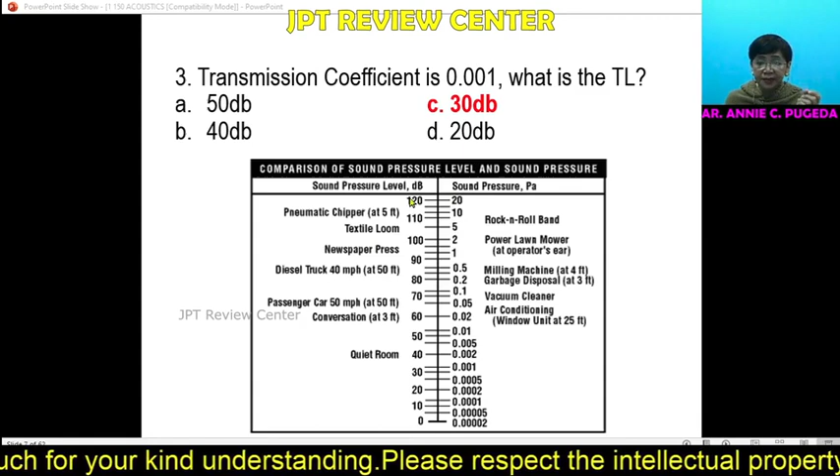So, actually, hindi nga TL yun, sound level. Now, tingnan nyo, if you compare sound pressure level, which is measured in decibel, and sound pressure, which is measured in Pascal - yung level, yung narinig mo, yung sound pressure level, maingay o mahina. Yun ang perception natin as human being. So halimbawa, pag pumalakpak ka ng ganyan, mahina ang pressure mo, mahina ang Pascal. Malakas, maingay din. So sound pressure level is equivalent to sound pressure, which is decibel and Pascal. Kaya nung sinabi niyang 0.001 transmission coefficient, nakikita niyo sa sound pressure, 0.001.

Ano katapat niya? Hala, 30. Anak ka ng Diyos, pag kabisado mo yan. Okay, yun lang po sinasabi ko. Ito yung mga, sige, bigyan ko kayo ng senaryo para ma-motivate kayo.

Control. Hi! Hindi pala control ba? Ayaw.

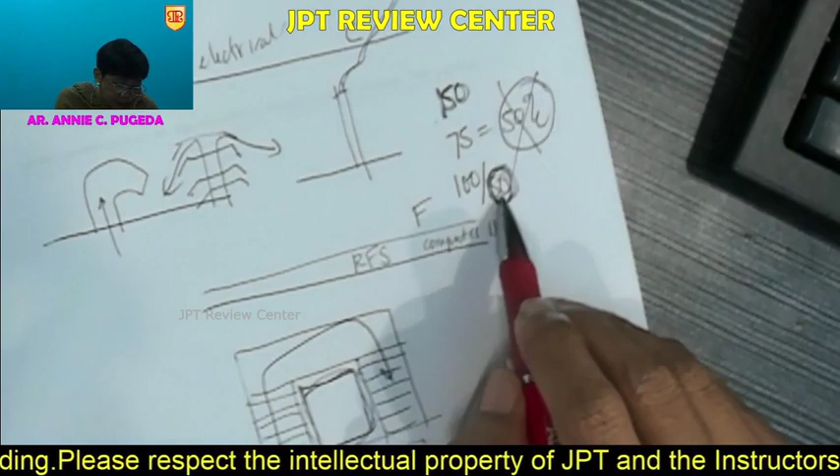150 items yung binibigay sa board exam. Assuming 75 lang nakuha mo, 75 is 50% transmuted. May tamang tulog yan, huwag yan ang ini-aim mo, kalahati nito. Pag na-elevate mo sa 100 over 150, sa decision making, ano yung 50 mali mo? Okay, ano yung 50 mali mo dyan? So pagka ganyan, 100 over 150, do the math, 100 divided by 150.

So lumalabas, nag-prepare ka sa 70. Kapasa-pasa yan. Nakita nyo, ipasa sa Diyos nyo na yung isang yan. Siguro nandyan na yan.

Diba? So look at it this way. Again, I'm repeatedly saying this. You have 150 questions na binabato sa'yo ng client, ng engineers, ng mga tao sa paligid mo. And then, once na tanong ka nila at nagkamali ka, decision making yan. What could be the 50 that you do not know? Na pwede mong sabihin, hindi ko kabisado yan, i-consult natin sa engineer. Okay? But for some na talagang alam na alam mo, that could be the 100.

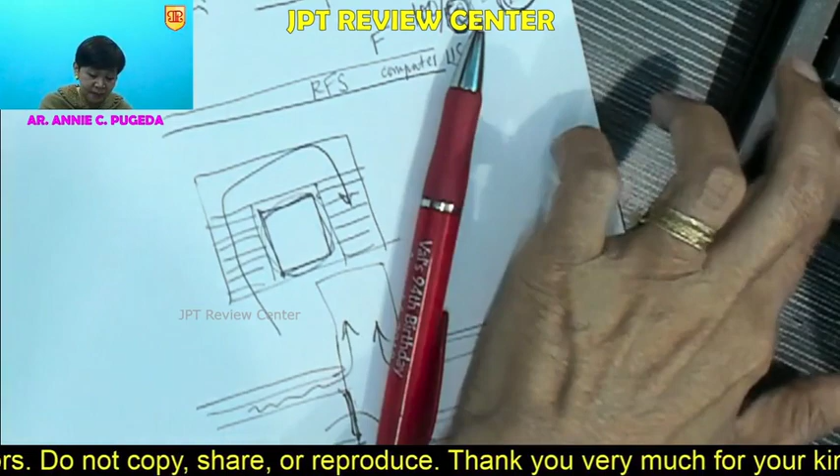The 50, that could be something that you need intervention or you need the help of allied professional services. So it goes to say na dapat man lang ma-elevate ang knowledge mo sa utilities or other subjects sa 100, or 70%, not 50%, kalahati. Kalahati alam ko, kalahati hindi, ganun. So itong mga ganito, yung example na ganito, pwede mo nang ipasa sa Diyos yan. Okay? Pero kung talagang guided ka, so be it.

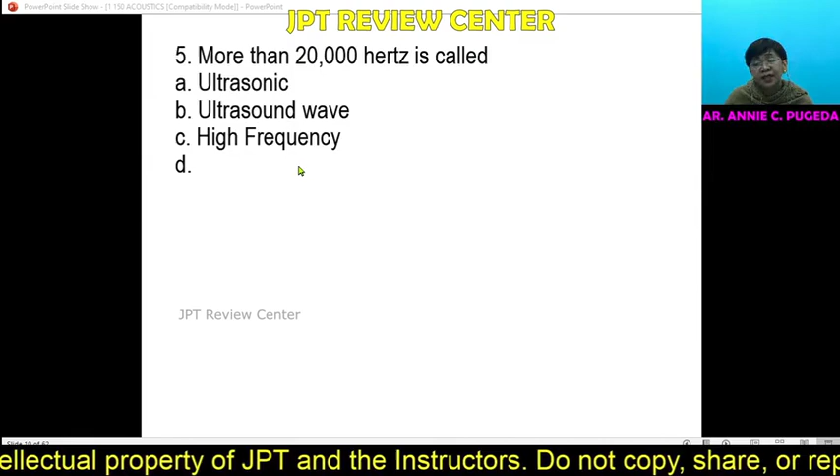More than 20,000 Hertz is already read by equipment like ultrasound, ultrasonic devices. So more than 20,000 Hertz is known as ultrasonic. The definition: the science and exploitation of elastic waves in solids and liquids which have a frequency above 20 kilohertz or 20,000 Hertz.

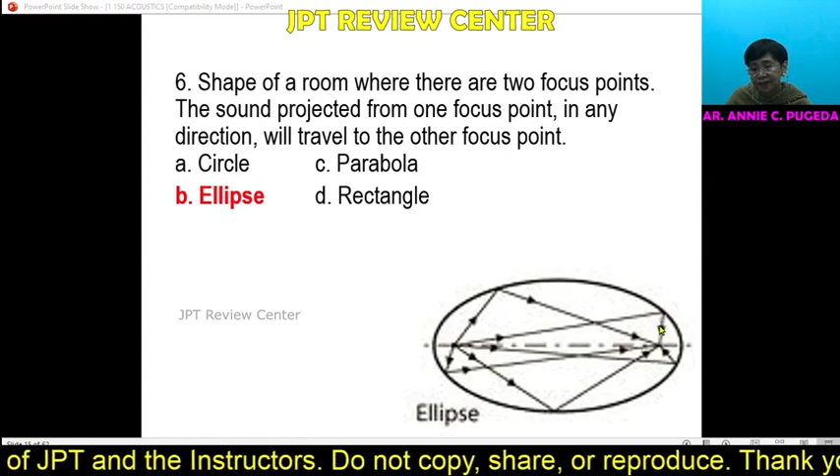Now, if you have a conference room and you want your voice to be equally shared, what would work? If you make it concave, it creates a specific focal point or what's called foci - concentrated, and that can be deafening. But if you make it convex, the sound spreads evenly. You already know the answer - convex spreads evenly, while concave concentrates sound at the focus point, which is deafening.

The shape of a room - as I mentioned, is an ellipse - has two focus points, one here and one there. With one focus point, that would be a parabola. So that's what's called sound foci.

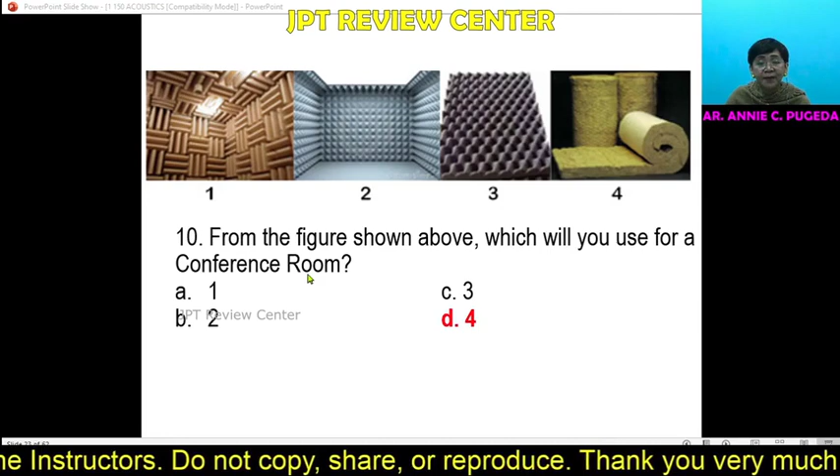Now let's look at the illustrations. From the figure shown above, which we'll use for a library, it's obvious that number 4, the mineral wool packed into the wall, is hidden from view. We don't see that mineral wool, but we know it's a good way to insulate the library from noise. So it goes the same for a conference room - it would also use mineral wool.

So a diffusing element would be best for a music studio. For example, when recording, you want to control the treble, control the bass, to balance it. The best way to control that is through wall, ceiling, or floor treatment which is more complete - so it's better to choose number 2 over number 3.

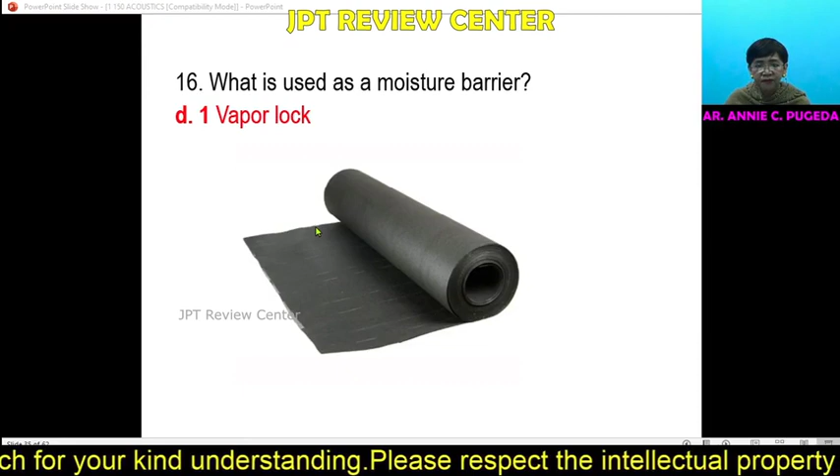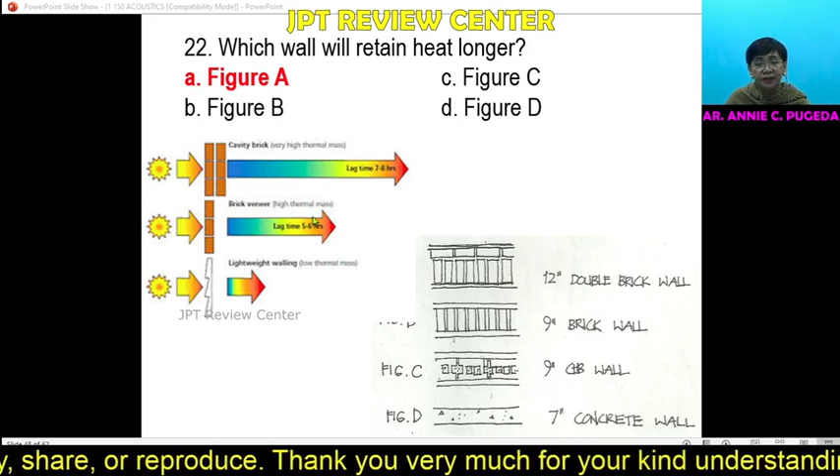And then, best sound insulation to be used in a house fronting a busy highway. This is similar to our dance studio example. So again, it didn't say veneer, but the better, thicker option, and that would now be a double brick wall.

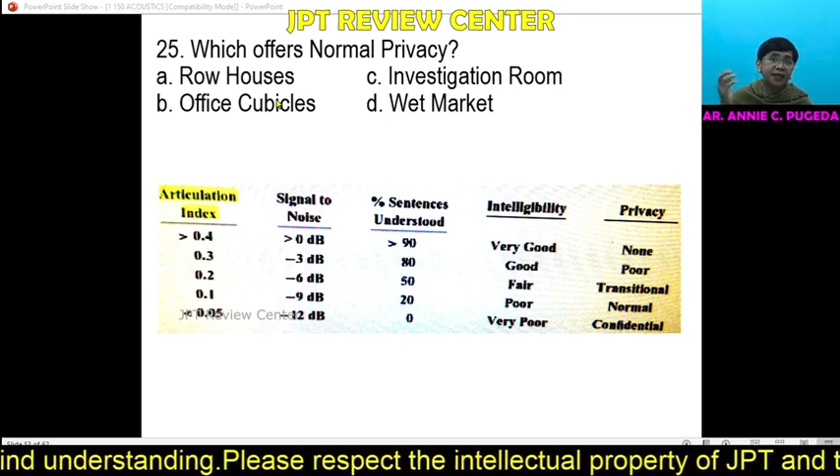What is the meaning of confidential privacy? Look, most often, this degree of privacy can be achieved only in closed offices, and therefore a room. And if it offers normal privacy, so your cubicles, especially the office or modular cubicles, they're not enclosed. So this is normal privacy because you have, remember the glass I mentioned earlier, glass because of visual acuity or glass because of reflection. That's it. Office cubicles, normal privacy.

This degree of privacy can be achieved in open offices, thus the office cubicles. This offers transitional or transmittal privacy, transmitted from one unit to another or one room to the other. So the privacy is lost in that part. And therefore, it can happen in row houses. Transitional privacy, that's how it's said. Okay?

Complaints are experienced by persons that wish for more privacy. This degree of privacy is often achieved in a room when no attention is paid to acoustical design. Right? Only a party wall separates them. So, go ahead, hear each other.

You are commissioned to design a music room, what will be used for flooring? Since we have wood, then I will stick with wood. But if there's a question like this, with no wood option, I will go to carpet. See? There it is. Vinyl, linoleum, vinyl composite, carpet it is.

Okay, so again, it depends on the situation, it depends on the choices. Which is not a good partition for a noisy crowded space, because it will reflect and reduce, it will cause a louder noise - smooth glass. Right? No different from what I said about toilet and bath being all tiles.

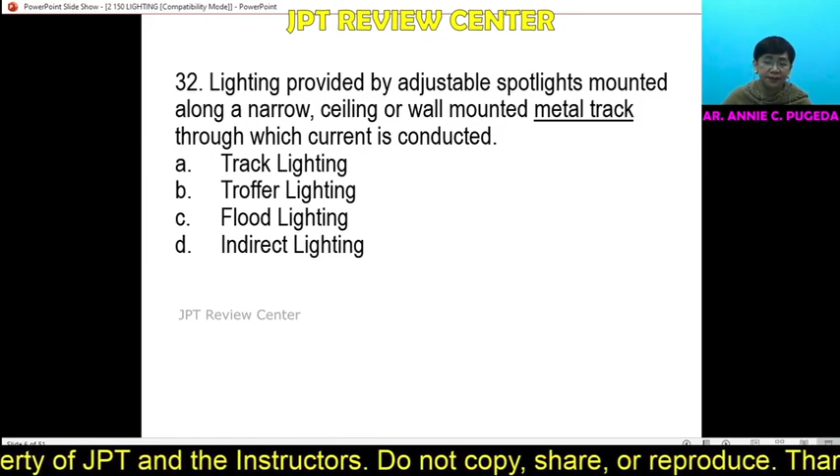When a CFL fits into a light fixture designed for an incandescent bulb, what is that called, if it has a casing? Well, this is the term - so, ballast is inside or integrated. So that's it, integrated CFL. Clear?

Okay, 8,000 hours, maganda na rin. Kaya lang, syempre, merong mas maganda pa. CFL muna 'to. So when it went to 50,000 hours, mas mura pa rin ang CFL talaga. And LED mas mahal pa rin sa market.

Which would you recommend as a secondary source of light if you want to conserve energy? Okay, so again, between 8,000 and 50,000, I'll choose LED.

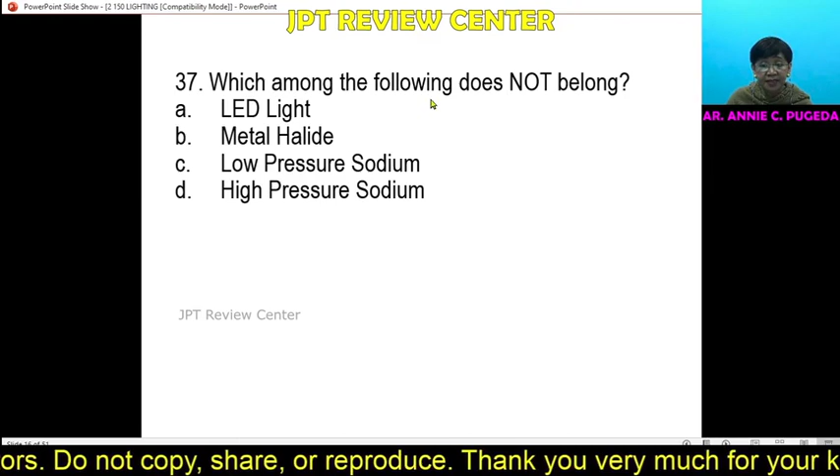Does not belong kasi hindi siya HID. Isa lang naman, hindi ba? So if you look at the choices here, there's only one that does not belong to the HID or high intensity discharge family, and that would be the LED. So B, C, and D are all HIDs, high intensity discharge.

Oh, take up natin 'to. Type of lighting is for billboards, so that would be your metal halide.

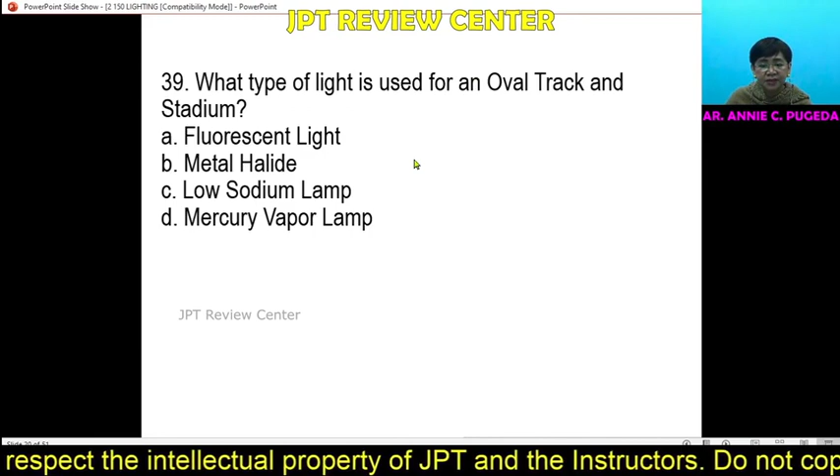Okay, gabi na, tapos nagdagay ng ilaw na ganito, tapos akala mo umaga, sobrang lakas. So that is used for oval track and stadium, and the answer is metal halide.

Rectangular light fixture that fits into a drop ceiling is usually designated to accommodate what? Rectangular. Ano po yun? O, D, T12, tingnan niyo.

Multifaceted reflector is MR16, the first illustration. Letter B is the PAR 20. PAR 20 indicated may mga maliliit na bumbilya. Pagka sinabi mong PAR 20, lagi may mga ganitong senaryo, okay, para siyang pinapaliit mo para hindi masyadong malakas yung ilaw niya. So letter C is the LED PAR 30, and D, T12, nasa baba, in cylindrical tube.

Okay, from the figure above, which would you recommend for a hospital facilities area? Siyempre, magbibigay sila ng general lighting. Yung puting ilaw, figure A, diba? Figure B, and figure D, mga white light, mga general lighting. So as we look at the choices, that would be A, B, and D.

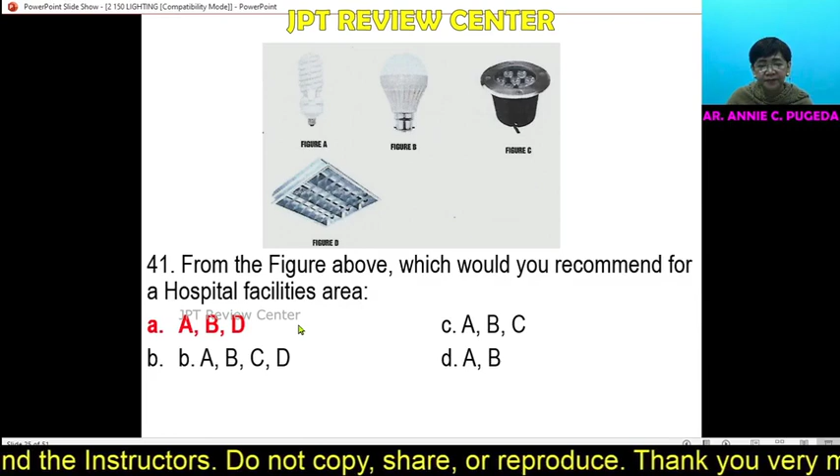A light used to illuminate the subject or an object from the back. Alam niyo yun, may mga pagkakataon na pagka inasa mo lang sa projector, tapos malaki yung screen, tapos naghuhulas na. Alam niyo pala, may sekreto doon, meron doon sa projector, and then meron din sa likod. Sa likod na yun, projector light din. Projection light ang tawag doon.

Okay, number 43, kita niyo, yung contextual clues ang hinahabol mo rito para mabilisan. May mercury siya, may tube, may phosphor. Ano yung phosphor? Yung pulbos na nakabalot sa inside ng tube. Alam mo na, ang pinag-usapan dito ay fluorescent lamp.

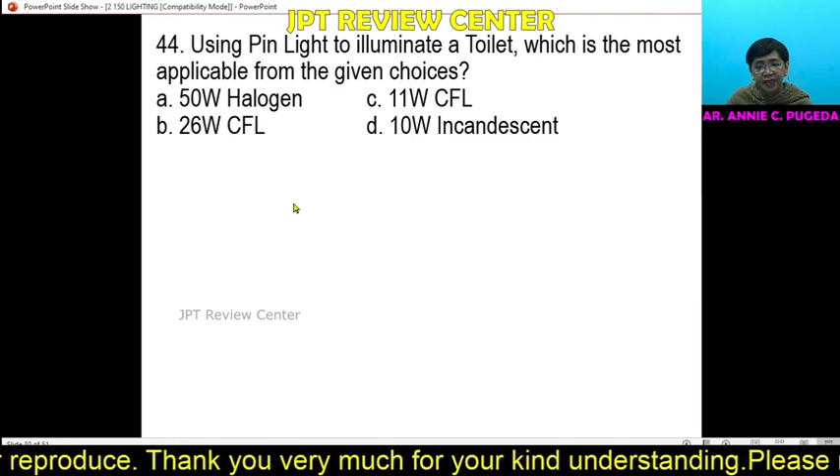Using pin light to illuminate a toilet, which is the most applicable from the given choices. Maliit 'to pero napaka-powerful, okay, and nakakatipid ng pera. So anyone knows? Parang naman narinig ko yung answer niyo, no?

Okay, sabi, 11 watt light sources replaces 40 watt bulb. Cost savings, extra long life, light output, and color rendering. Energy cost savings up to 77%, perfect for residential commercial uses. So nakita niyo yan, diba? And that would be now letter C.

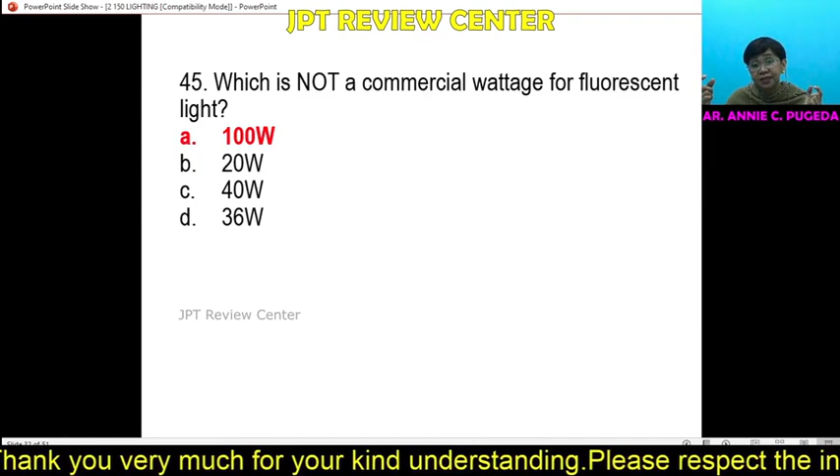Okay, na-touch up na natin 'to kasi kung bibili ka talaga ng commercial wattage for fluorescent, yung mahaba, which is at 1.2, is 40 watts. Yung mas maiksi, which is at 0.60 length, is 20 watts. Tapos yun, nung ginawa ng Philips ba yun, yung 40 watts ni-reduce niya pa ng 4. So 40 minus 4, 36, yun yung commercial na wattage nung fluorescent. So therefore, wala talaga nag-play ng 100 watts of fluorescent.

Provides uniform light on a white area. Uniform, ha? Anong answer doon? O, broad beam kasi ang floodlight, so uniform on a wide area.

What type of light is used for cove lighting? Obvious po ba? Fluorescent light, kasi nakatago naman.

And a lighting element usually installed at a lavatory, which is also considered wall-mounted decoration. Minsan dito, minsan dito, minsan dito. Well, it is known to be the alcove. Okay? Ayan, mga ganyan, no? Pa-effect yan, kaya na mga ganyan.

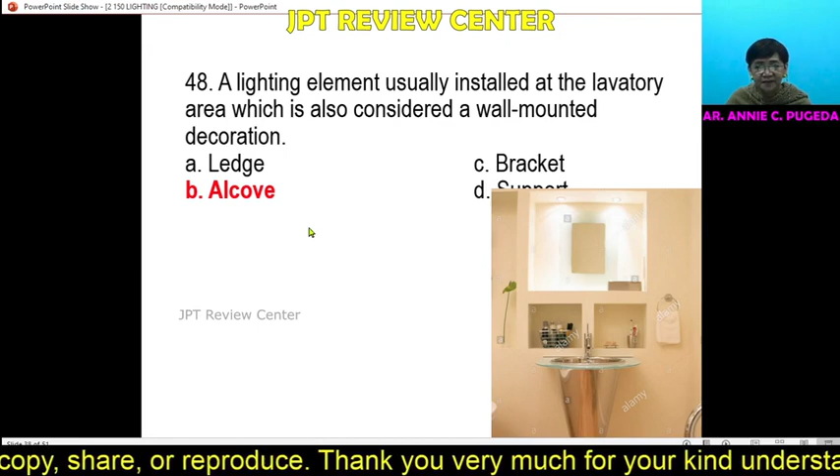And then, what do you call? Ang maliit 'to in diameter, 5/8 inch in diameter, P5. O, sa ginagamit yan, sa ginagamit, alam niyo na ang answer: cove lighting. Okay? And then, which light is used for reading?

O, so ano ba mas malakas? Diba, mas malakas na malumanay sa mata. Hindi LED.

Type of light fixture wherein the protective housing is concealed. Concealed, may tatago po behind the ceiling or wall. That would be recessed.

So para makita yung mga differences na ganyan, dapat alam niyo yung type of fixture na talaga para sa ganyan. So halimbawa ito, o nakalagay, chain or pipe. Chain or pipe, so ano naman 'to? O, pendant light. And then, sconce is wall.

Okay, baka lang maibigay, so nilagay ko lang additional information dito. Sconce lighting is wall, wall bracketed, tinatawag.

What lighting should be used for task area? Of course, yung mas maliwanag. Hindi po siya kasi reading yan, task eh. Di cool light. Okay?

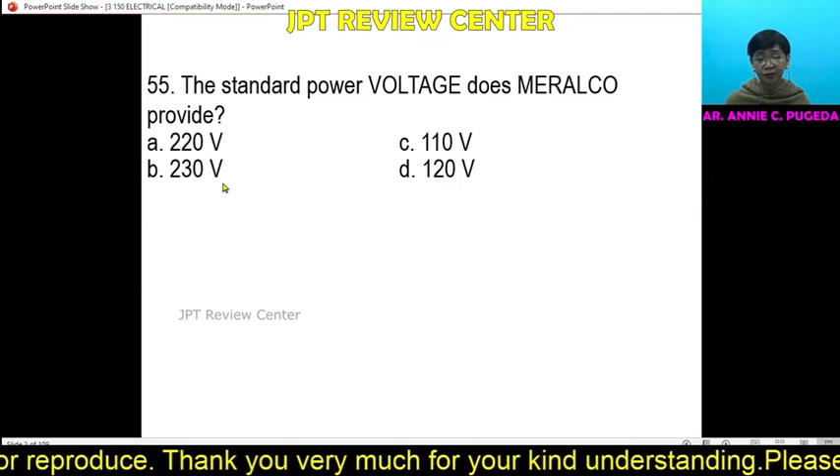Okay, so electrical naman, napakadali kasi nakikita mo na sa general notes. The standard power voltage that Meralco provides is 230 volts, line to line or line to ground. Line to line from there, pumunta sa kisame, pumasok sa bahay mo. Line to ground is from the service entrance cable, bumaba sa underground feeder. So 230, use 230 volts alternating current, single phase, 60 Hertz. So alam niyo na yung answer sa 56, that's 60 Hertz.

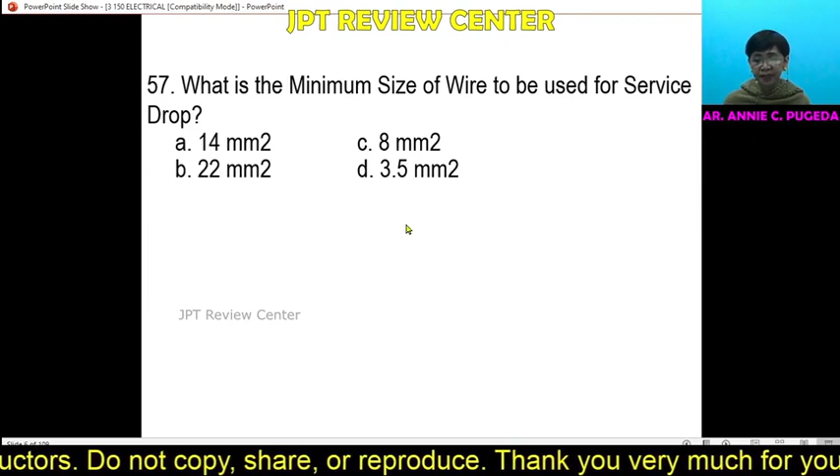How many wires come out from a transformer or electrical company? Positive, negative, and neutral. So 3 wire tayo.

Kitang-kita naman mga na pumasok, oh. Ano yung may louver dyan? Transformer yan. Kaya nga minsan, even if your facade is marred by utilities, wala kang magawa eh. Pangharap talaga yan kasi yan ang papasukan kagad eh. So kita nyo, pumunta sa pipe stem pero pupunta yan sa transformer. So yan ang nangyayari, kaya 3 yan. And of course, pagka tinignan natin sa previous natin, that would be for the grounding. Only the electrical utility company is allowed to disable this. Alam nyo na kung ano yung pumasok, ano yan? The service drop.

Conductors of a service drop or lateral are owned and maintained by the utility company.

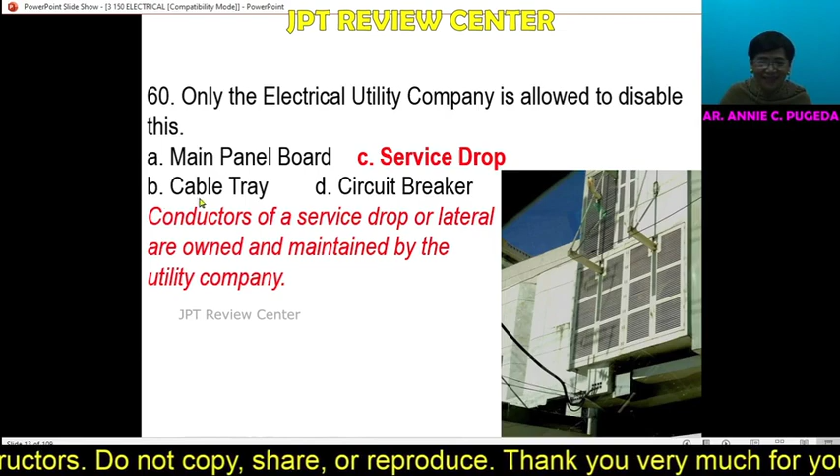Standard color of a ground wire is green. And what is the code for a live wire? Red.

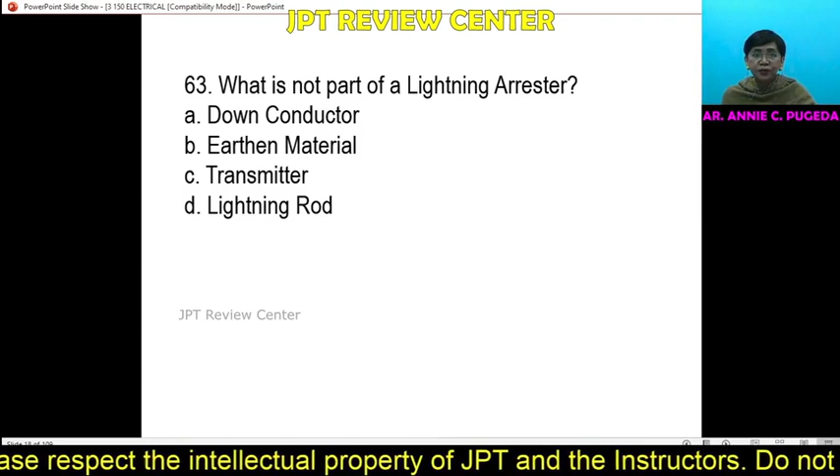What is not part of a lightning arrester? Kasi hindi pa, nandun siya sa roof deck. Tinamaan, bababa yan, pag bumaba, down conductor yon. So yung tinamaan yung mismong rod. So pagbaba niya, pupunta sa earth, which is the ground, earthen material. So ba't mo itatransmit, diba? Ayun yung answer, ayan po, the yellow. Nakita nyo yung roof deck, meron siyang earthen material, para doon na lang, para hindi madamay yung floor below.

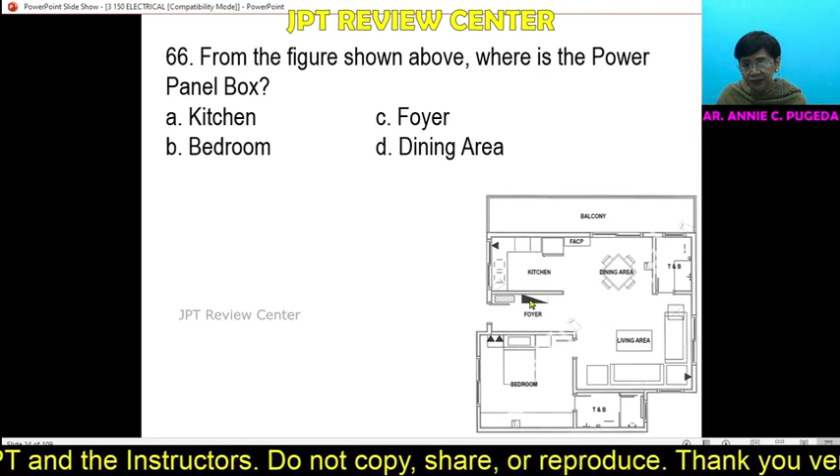From the figure shown above, where's the power panel box? Power panel, di ba lighting panel, power panel, nasa foyer po tayo. And where's the manhole? Ayun po, yung may X na nasa living area, kita niyo po.

What is FACP? FACP, yun sa malapit sa kitchen, malapit sa ref, is fire alarm control panel. In commercial word, it's known as fire annunciation panel or FAP.

How many TV outlets? Okay, tingnan natin. TV, meron siyang isa rito sa dining area, at meron din siyang isa dun sa bedroom niya. So 2.

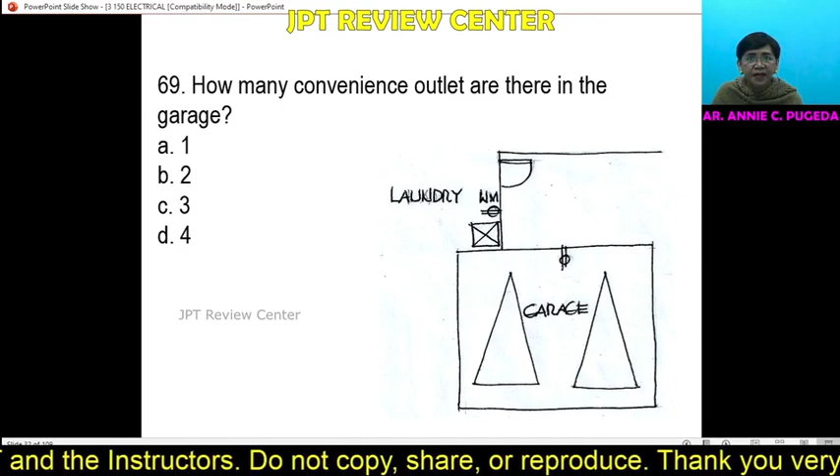Okay, although wala yata sa inyo yan, added feature lang. How many convenience outlets are there in the garage? Sometimes they pronounce it garage. Isa lang naman, convenience outlet. Do not count the plug, count the plate. Okay, so 1.

Source of electricity is also the longest and largest river.

Ay, nandun naalala ko tuloy yung nangyari sa Ulysses. May kamag-anak kami doon, naku po, wow, devastating talaga nangyari dyan. Cagayan River, okay? Also known as the Rio Grande de Cagayan, longest river, largest river by discharge of volume of water. Ay kita nyo, grabe yung nangyari sa kanila during that time. I was prepared for, hindi naman ako nandun, I was really prepared for Rolly kasi sobrang media hype. Nung pinabayaan yung Ulysses, yun pang nakadali.

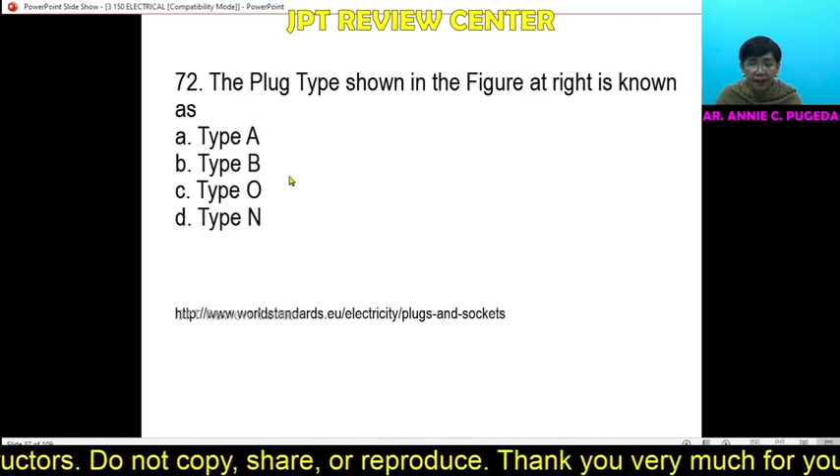In plumbing, a valve is used to regulate the flow of water, siyempre on-off, on-off. So what is its counterpart in electrical? The switch.

The plug type shown in the figure right is known as... ba't nawala? Ay, bakit po nawawala ang plug type ko?

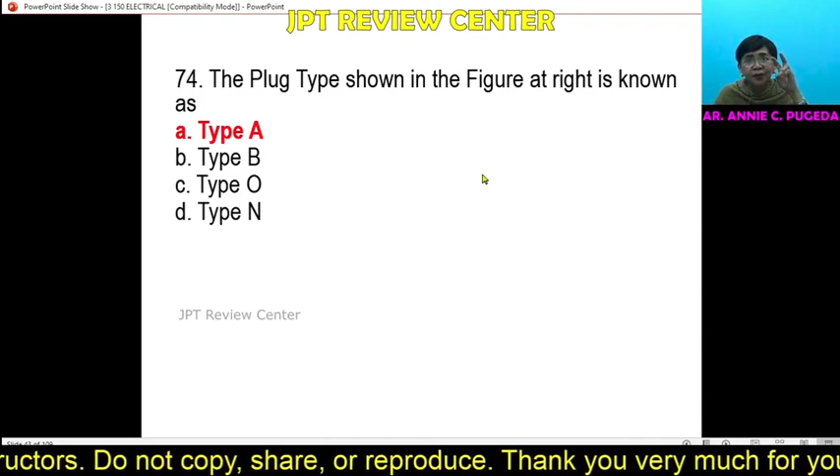Okay, type A. I'm sorry, I don't have the illustration, I don't know why it's missing here. Type A has only two, two flat prongs, okay?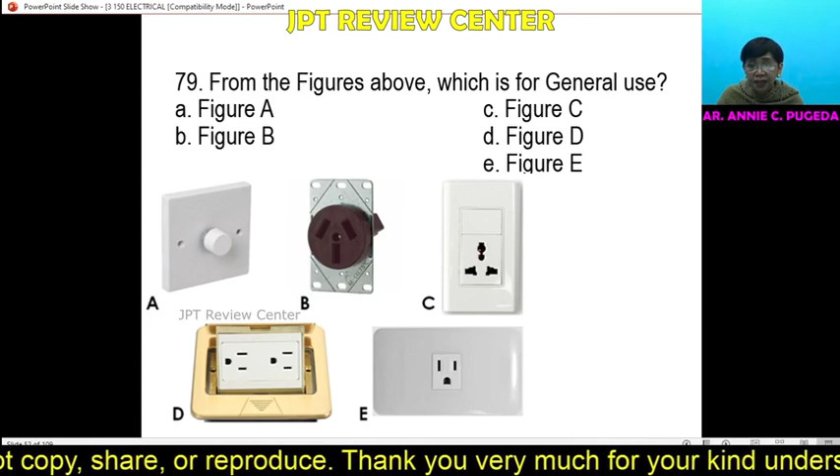That one, it closes and opens. That's figure D. Dimmer, of course we already discussed this, is to control the intensity of light. That would be figure A.

General use. For general use, we have this, figure E. Okay?

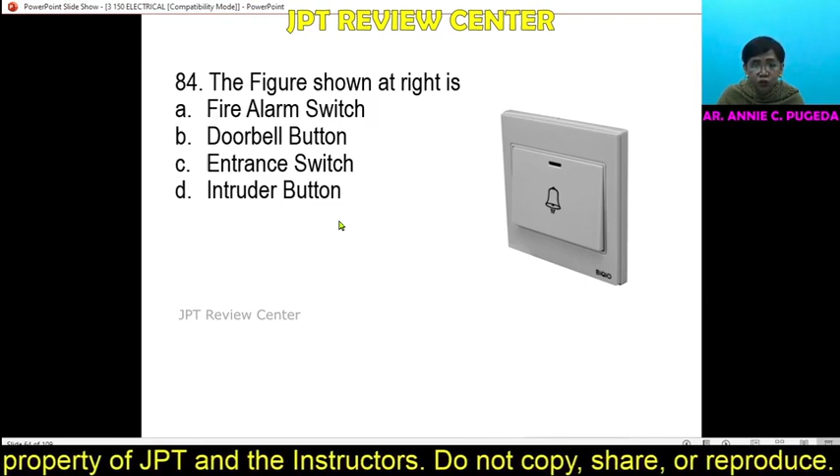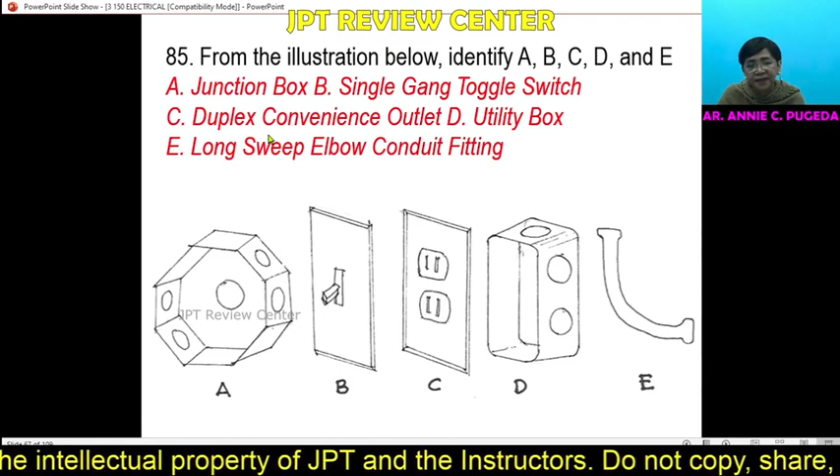Splicing, so that would be junction box. And located at the back of a convenience outlet, we already know, not just convenience outlet, but also switch plates, the answer is utility box.

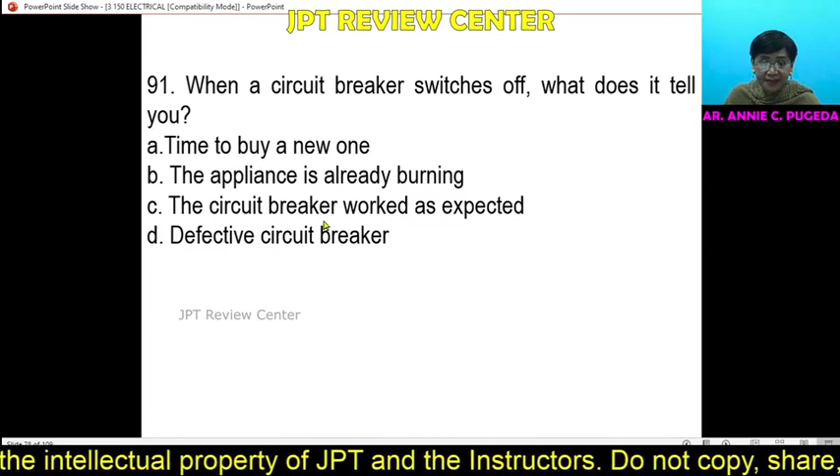When the circuit breaker switches off, what does it tell you? It's time to buy a new one? No, that's not it. It tripped, that's how it works. So, the circuit breaker worked as expected.

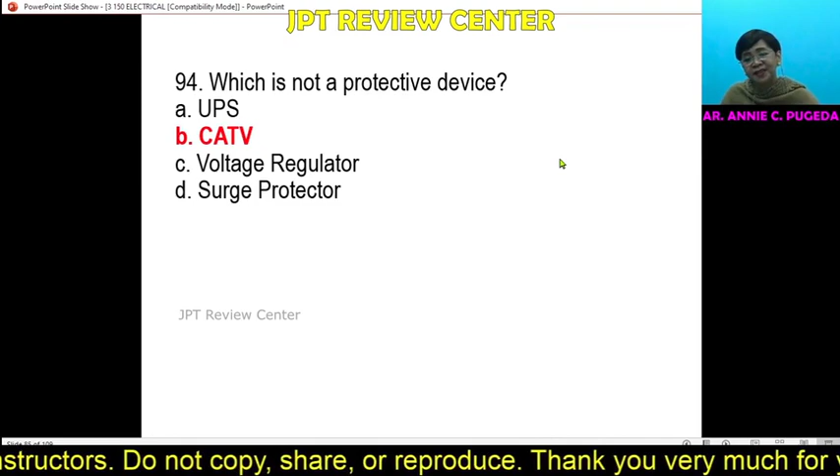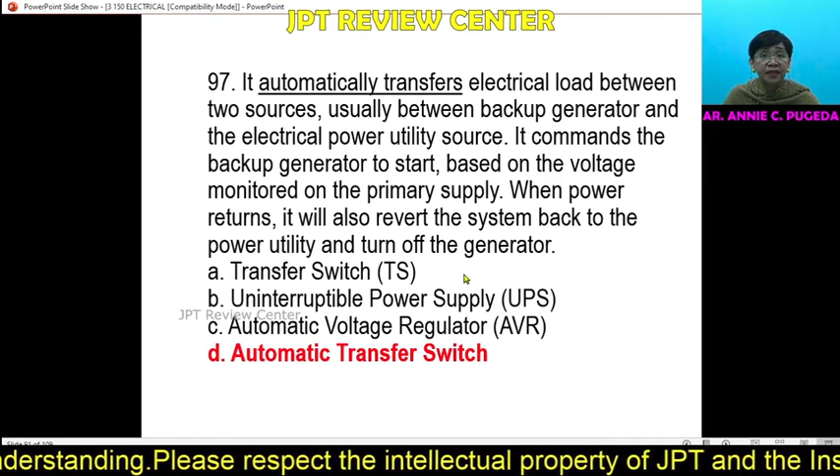From the word itself, it automatically transfers back to the power utility and turns off the generator. So, backup generator - we know this to be the automatic transfer switch.

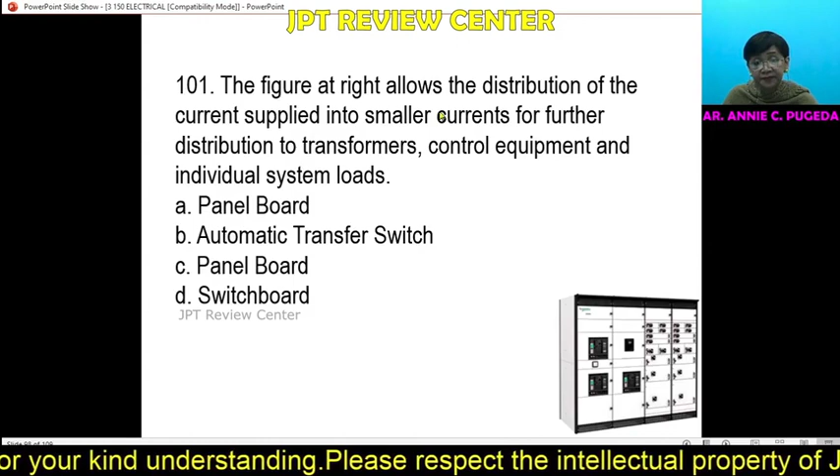This is in the electrical room. It allows distribution because it's placed after the transformer. So, it is the switchboard.

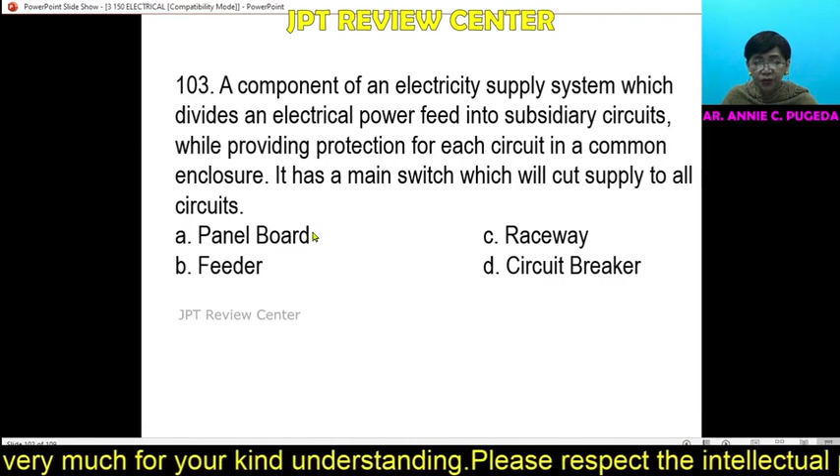A component of the electricity supply system which divides the electrical power feed - so it divides into circuit breaker 1, circuit breaker 2, 3, 4, 5, 6, and so on. You already know that - that's the panel board.

And just like there's a riser for your water, there's also a riser for your electrical system - these are the ones using pipes. A special conduit for electrical wire building, arranged in an orderly, organized, and safe way, is known as the electrical riser.

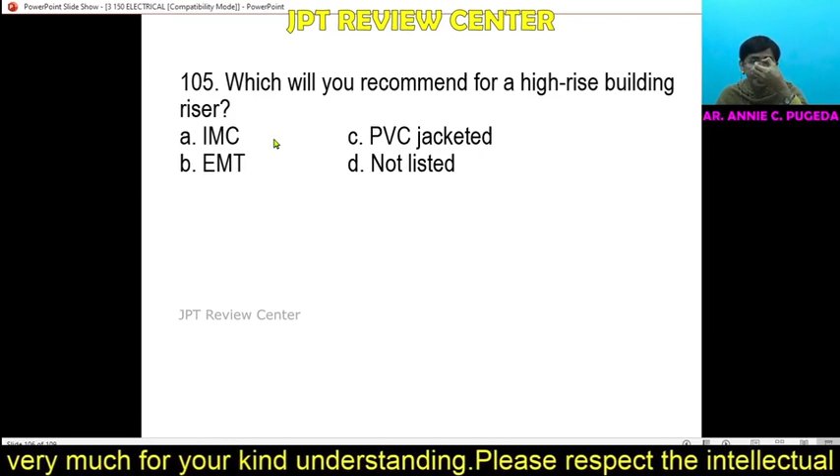Which will you recommend for a high-rise building? For that, you need sturdy material. That's the time you don't want to gamble with plastic. You also won't use RSC because RSC is known for the feeder, these are the cables running on electric risers. So we're okay with IMC or intermediate metal conduit.

What's the difference between IMC and EMT? IMC has a larger diameter. EMT is smaller because it's tubing.

Also called thin wall, thin wall not threaded, thin wall. Steel raceway, circular cross-section. It has the presence of set screw, compression type couplings, connectors, integral coupling, with a bell.

Okay, you already know that. Among the three, RSC, IMC, EMT, this one has no thread. EMC, EMT, electric metallic tubing, electric metallic conduit. So we're looking at set screw, that's it, you can see it. And the bell, and the compression type couplings and connectors. There, so this is your EMT.

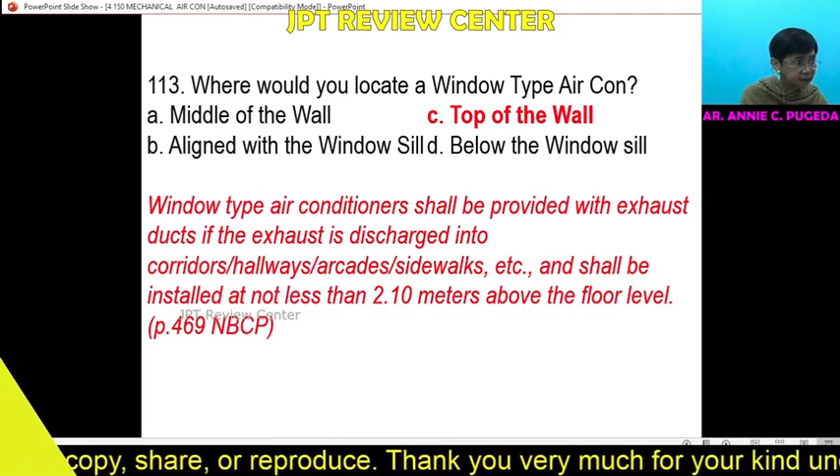Why? Remember our discussion in the comprehensive exam review. Okay, why is it placed on top of a wall? Letter C, that's it too. Okay, first of all, there's a given. It's stated as 2.10, 2.10 meters. So that's taken from the National Building Code of the Philippines. And then, the principle.

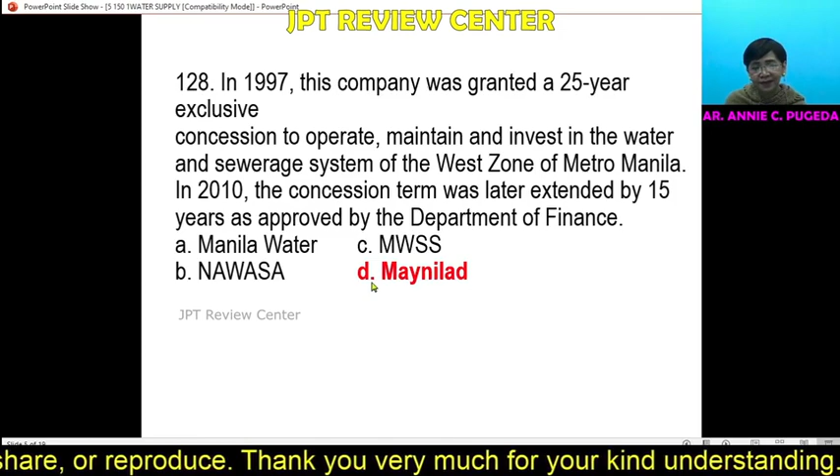Okay, we're on number 128. Under the concession agreement, MWSS is the big entity, now divided into east and west sectors of Metro Manila. The east sector collects fees through Manila Water, while the west sector is served by Maynilad.

You were hired to do renovation works for a 6-story building. You noticed it has no elevated water tank. What was used instead? Since it wasn't attempted as a roof deck, maybe it was costlier, so from the pneumatic tank down at the cistern, it was pumped upward all the way to the 6th floor. So what system was utilized? An up-feed system.

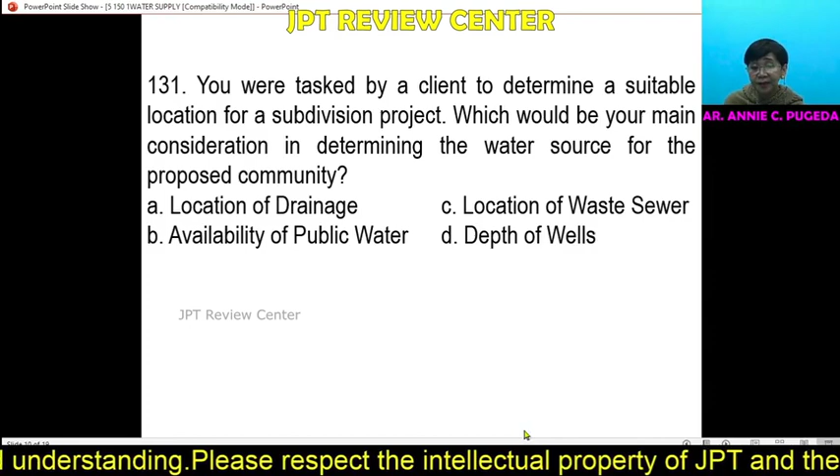You are tasked by the client to determine a suitable location for a subdivision project. What would be your main consideration in determining the water source for the proposed community? The best case is having your own water source, or having an existing line or tapping point instead of digging. So availability of public water, like from MWSS, where pipes are already there and you just tap in.

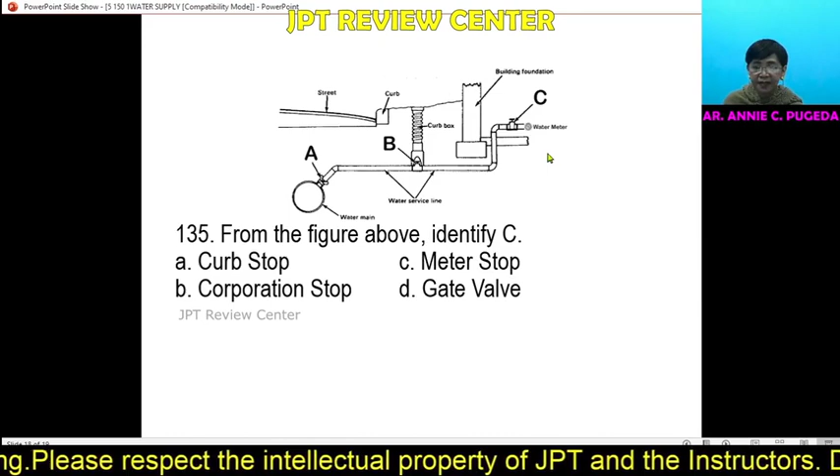Now we have an illustration for individual water supply tapping on a level 3 basis. What is A? That's the valve used to stop the main water line flow, known as the corporation cap or corporation stop. There are 3 stop valves involved - this is the first one. Along the sidewalk area we have what's called the curb stop or curb cut, since it's located at the curb. Then letter C is already inside our house, within our property. We appreciate if you described it as a gate valve, but the semantics of the question involves 'stops' - corporation stop, curb stop, and therefore your gate valve is now the meter stop. Be aware of that semantic distinction.

That's a slide for your 150-item pre-board exam.

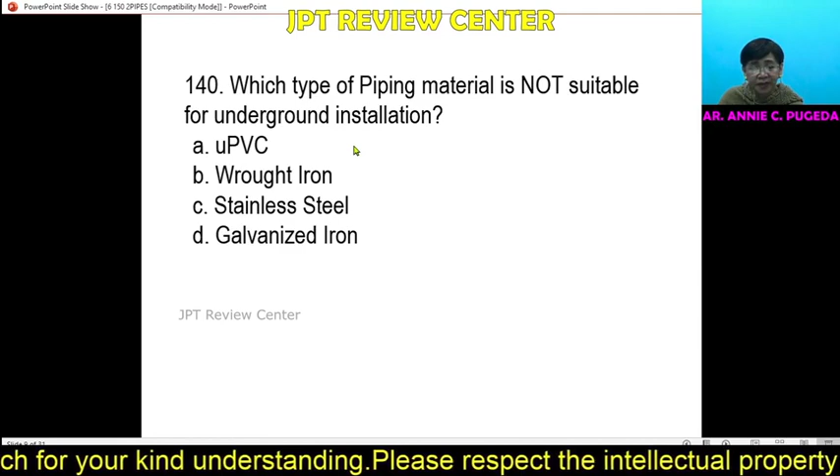What pipe should not be buried underground? It's also known as wrought iron, which is black iron. So the answer is B. Then, which type of piping material is not suitable for underground? It's the opposite case - still B, wrought iron. Same answer.

As per the sanitary engineering code, what's the color code for drainage and sewage pipe? Okay, that would be...

Orange. Kasi noong unang panahon ng clay pipe, nakita nyo naman yung clay pipe, kulay orange siya. So, they had this idea to separate water from sanitary. Gawin na lang nilang orange.

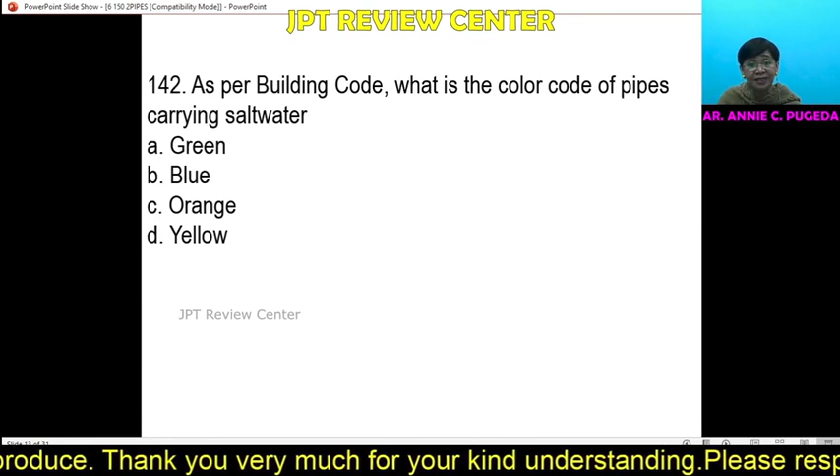Very distinct. As per building code, what's the color code of pipes carrying water? Lahat ng tubig, based on National Building Code, there's a table that shows that water are all color-coded green. Ito po yon, on page 47.1. Water cold is green, water distilled is green. Pagka hot, kasi may steam, yellow yan. Pagka water high pressure, kasi may steam na involved, green is the prevalent color.

Water hot, yellow. Basta mainit. And the only one that you see color-coded red is water or fire service. Okay, so yan po yan.

Now, let me explain. Baka inisip nyo plastic pipes. Kontra po sa National Plumbing Code, sinabi po sa National Plumbing Code, blue ang color code for water. That was the time when they were introducing plastic pipes sa Pilipinas. And 1999 is the amended National Plumbing Code.

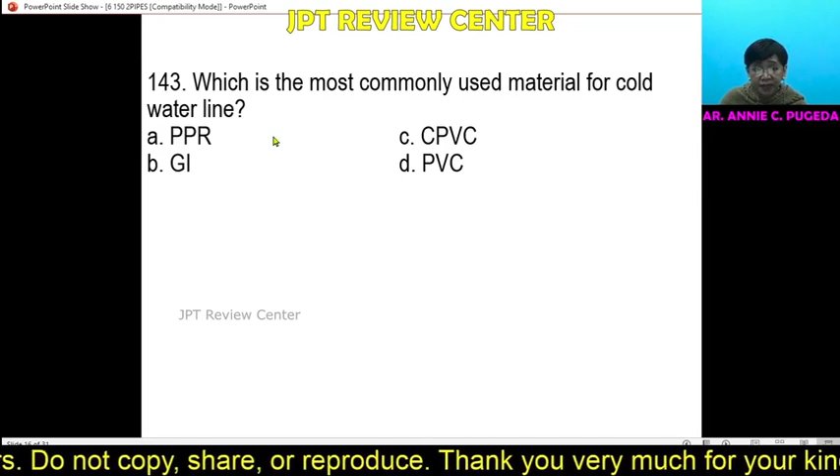So, with all due respect, yung sinabi niyang blue, they were looking at plastic pipes. But ganito to eh. Halimbawa, meron akong pipe, steel pipe, pininturahan ko ng green. So, color-coded green na siya, that's for water na ginamit ko. So it's not, this table is not talking about plastic pipes, it's just talking of the color presented. Halimbawa yung red, palagay nyo red siya, pininturahan lang yan ng red eh, so black yan, kumbaga. Yun, pininturahan to have that color coding.

Which is the most commonly used material for cold water line? Usual, sabi niya, kasi ang CPVC is for hot water. Polypropylene is also for hot water and not common. GI, of course, nung unang panahon yan, cold water, hindi na ginagamit kasi nangangalawang.

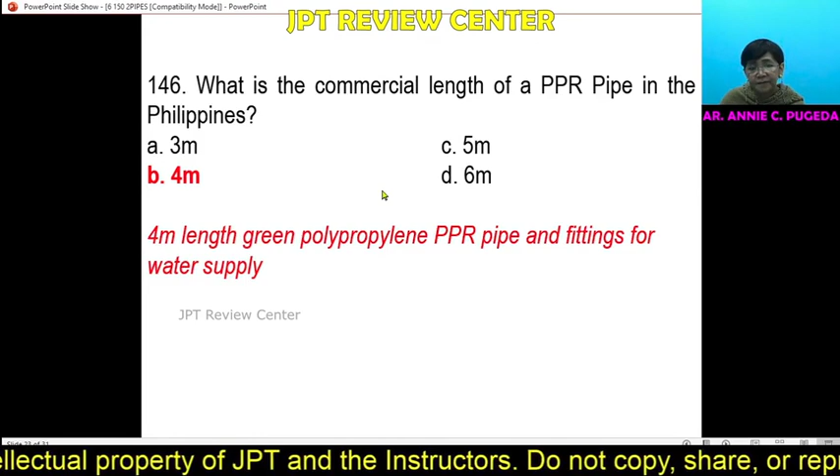Commercial length of GI, ito, syempre, table lang ang hanapin yung brochure eh. But ito yung mga available sizes, 6 meters. Then length of PVC, again, up to 12. So 6 up to 12. And then PPR, okay, 4 meter length, green polypropylene.

And then, what is used for both, for sanitary pipes? Alam natin, for both cold water line and sanitary, ang pinaka-ginagamit palagi is the unplasticized polyvinyl chloride. So that would be the letter D.

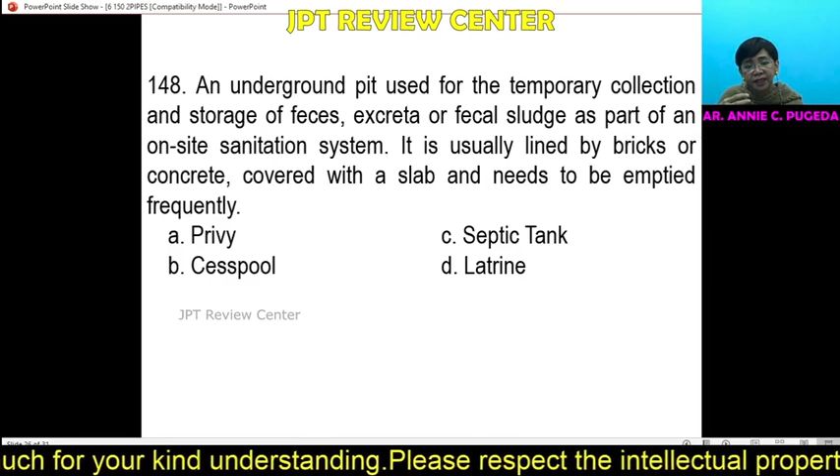An underground pit used for temporary collection and storage of feces, excreta, or fecal sludge as part of an on-site sanitation system. Hindi siya, this is isa pang term na ginamit yan, is non-water type. Kasi ang water type is septic tank, ito non-water type. So na-drain, frequently emptied, naging dry well siya sa seepage pit eh. So emptied frequently, and that would be now your cesspool.

If the site has no existing sewer system, what is the solution as per National Plumbing Code? That's the reason why, pagka ganyan, binubutas yung bottom ng leaching chamber kasi seepage downward. Ekwan naman to eh, probinsya, pero hindi po pwede to sa mga urban. Pag urban talagang may reinforced concrete ka sa leaching chamber, so soli mo yan sa main sewer, yung liquid waste. Okay, so provide septic tank.

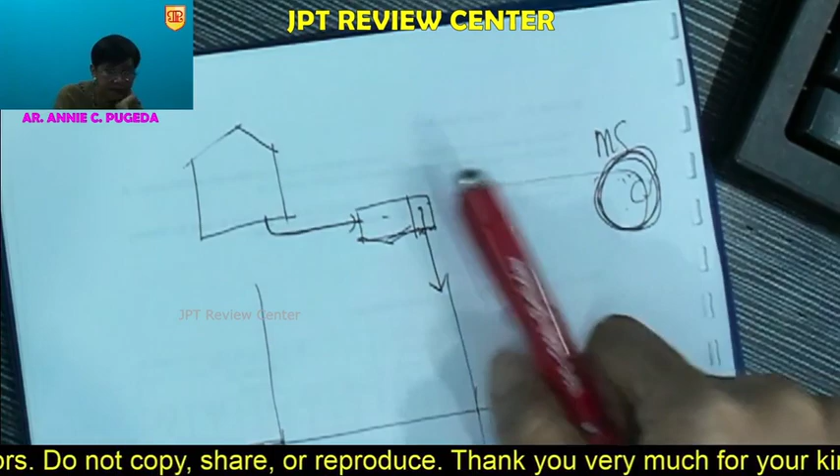Halimbawa, ay, lalabo, okay. So ito yung bahay mo, and then naglabas ka, ito na yung septic tank ko. So supposed to be, kung may continuation na sa main sewer, may lalabas na tubo dyan. Pero probinsya, wala nga ito eh, non-existent to yung main sewer. Non-existent yung main sewer, so wala kang continuation to that. So mangyayari, lahat ng waste mo pupunta dyan, and then liquid lang naman yan, so seepage downward siya. So wala siyang sapo rito, kasi wala nito, wala itong existing na to.

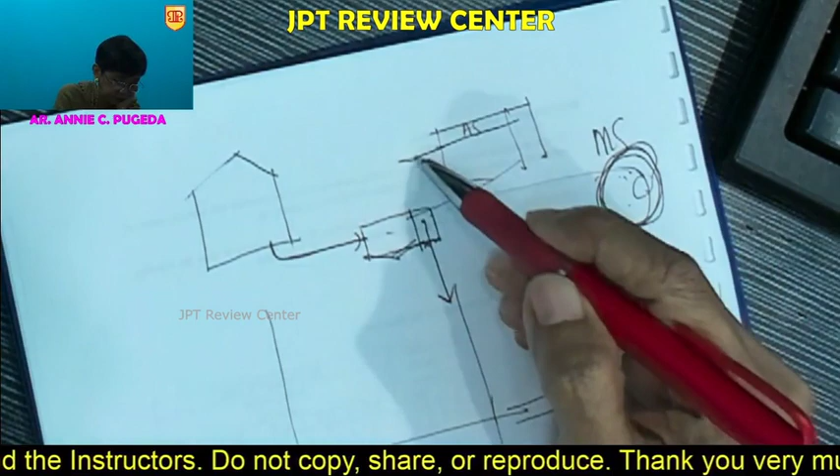So, what is the minimum water level of a septic tank? Alamin na po yan, it is starting from 4 feet, and the maximum for 100 target users would be 1.8. Okay, here, 4 or 1.2 meters. And again, yung 1.2 na effluent niya is taking it into this. Hindi kasama yan, airspace yan eh. So ito yon hanggang dito, and that would be 1.2, okay, or 4 feet. That ends, ilan ang tama sa inyong exam?